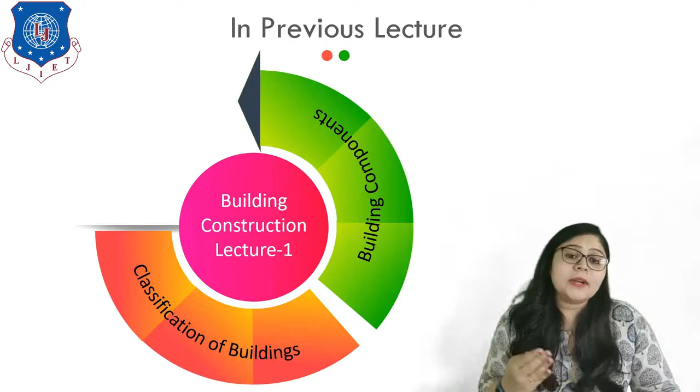In today's lecture, we are going to describe the types of load acting on a building, and our second topic is types of foundations. So without wasting much time, let's get started.

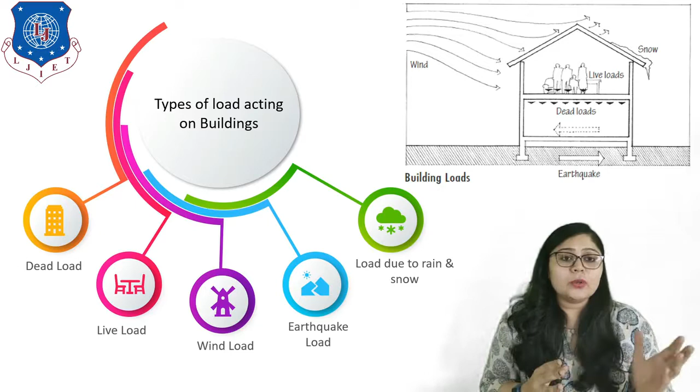What are the different loads acting on any building? Basically, dead load, live load, wind load, earthquake load, and load due to rain and snow are the primary loads acting on any building. Before constructing any building, we should understand and calculate all kinds of load acting on it so that we can provide safety factors regarding that particular load. On screen, you can see different loads acting with respect to different directions on a building.

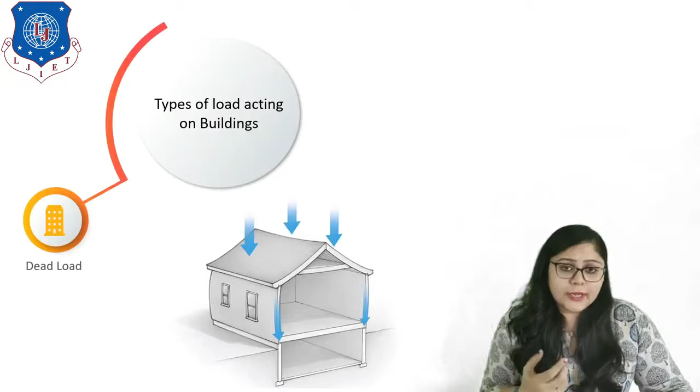Now let's discuss all in detail. First is the dead load. What is a dead load? It is a permanent, immovable and untransferable load, meaning it is something which is fixed. For example, the weight of material is something which is permanent.

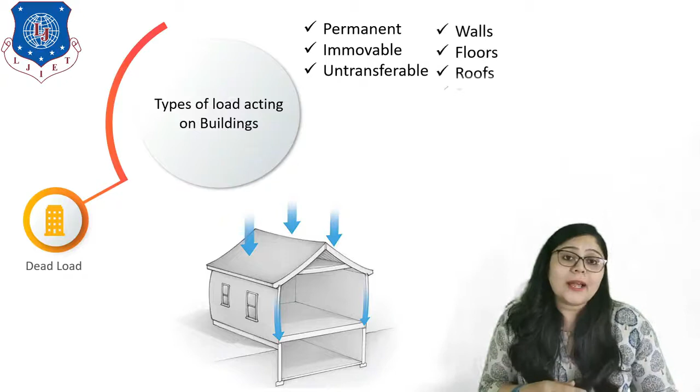Self-weight of structure is considered to be a dead load. All components of any building are considered dead load, like walls, roofs, floors, partitions, ceilings and water tanks. So the question is how to calculate a dead load.

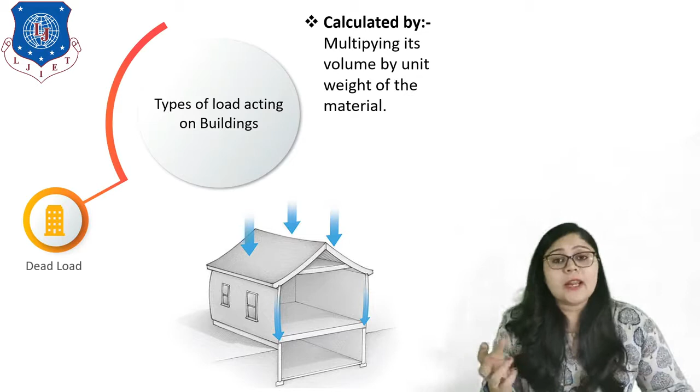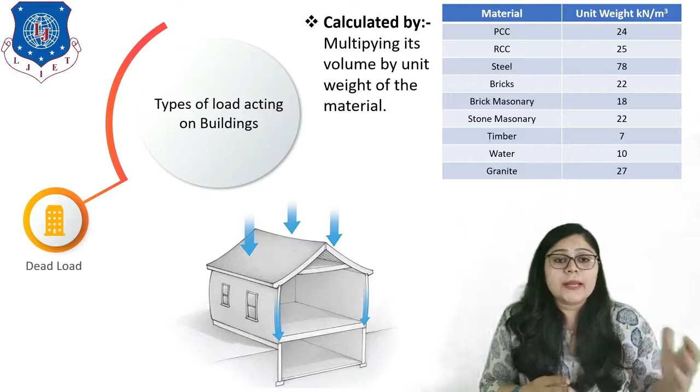We can calculate it by multiplying its volume by the unit weight of the material, because different materials have different unit weights. Here a table is given on screen where different materials like PCC, RCC, steel, brick masonry, stone masonry, timber, water and granite have different unit weights, which is important for calculation. So this is all about dead load.

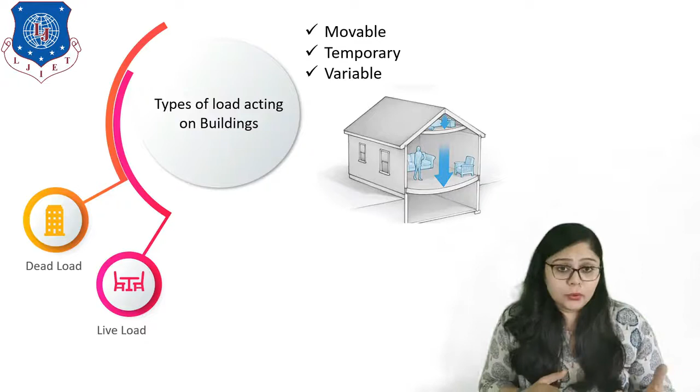Now let's move to the second one, which is live load. What is live load? Basically, a load which is movable, temporary and variable is considered to be live load. The people living or working in a particular building are considered live load. Even furniture is also considered live load because it is movable, and sometimes we can add and remove furniture as per requirement. So weight of inhabitants, residents and furniture or any stored materials are the live load.

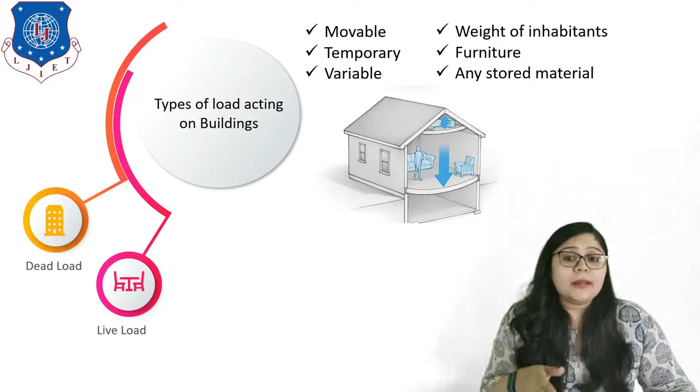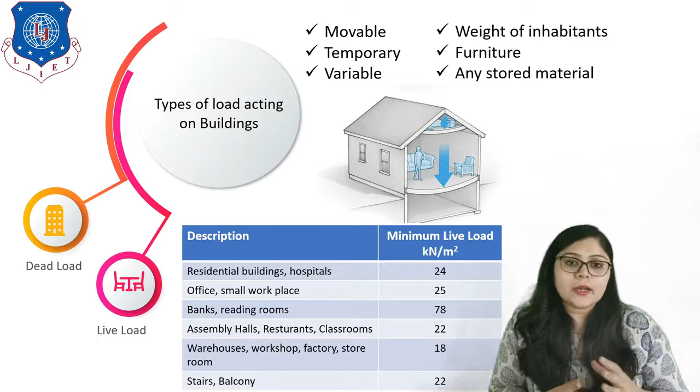Different buildings that we already learned about in classification of building based on purpose, like residential or industrial, all require different kinds of furniture, and the number of people varies accordingly. In this table, a description of different types of buildings like residential buildings, offices, banks, assembly halls, warehouses and stairs is given with respect to their minimum live load in kilonewton per meter square, for your better understanding of calculation. So this is all about live load.

Now let's move to the third load, which is wind load. Wind load comes into picture when we talk about tall buildings. Which building should we consider to be a tall building? When the height of a building is greater than twice its width, it should be considered a tall building. So this is the concept of a tall building.

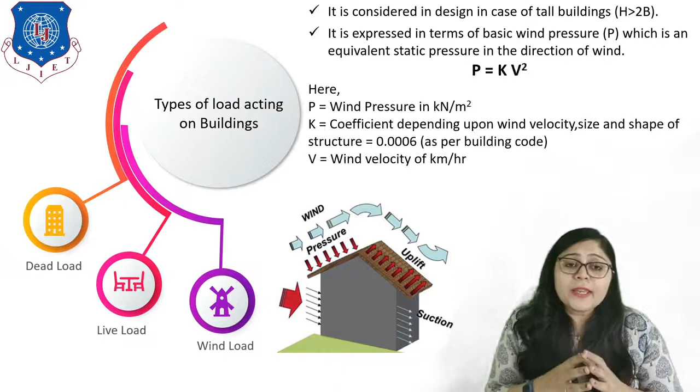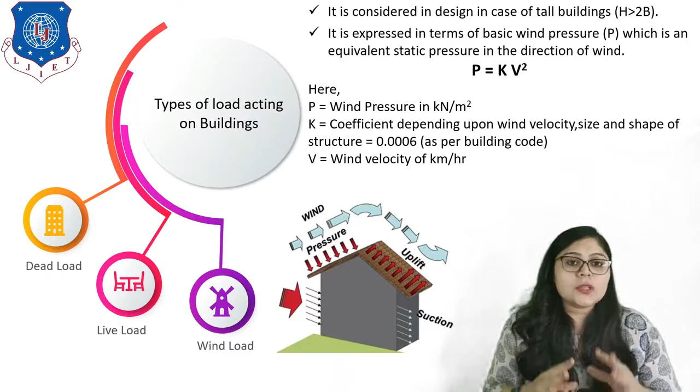Now you can see how wind pressure acts on any building. Generally it is expressed in terms of basic wind pressure, which is an equivalent static pressure in the direction of wind. To calculate it, P equals kV square, where P is the wind pressure in kilonewton per meter square, and K is the coefficient depending upon wind velocity, size and shape of the structure. As per the building code, it is generally decided as 0.0006, while V is the wind velocity in kilometer per hour. So this is the calculation for wind load.

Now let's move to the next topic, which is earthquake load. So what is an earthquake first? Let's assume we are moving in a bus. Whenever the bus is going and a sudden brake is applied, our body tries to resist itself at that particular point.

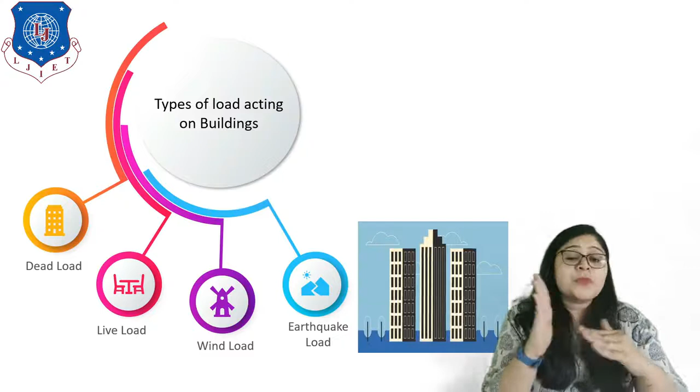The same thing acts with the building. When a building is standing, it is actually moving with the earth, but due to tectonic movements, or the movement between tectonic plates, a horizontal directional or sudden impact force acts on the legs of the building. So the building tries to resist itself. We can say earthquake load is something which acts horizontally.

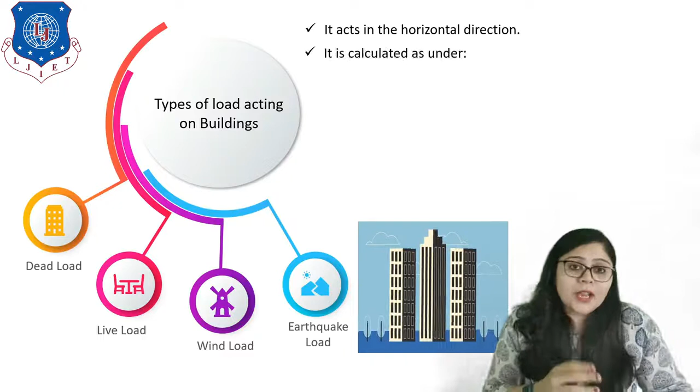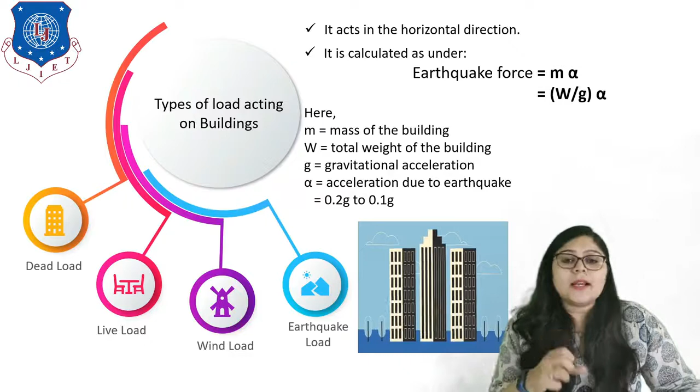Now moving further, the next is the loads due to rain and snow. Both these loads act on the roof, the uppermost area of any building. So depending on the shape of the roofs and its capacity to retain the snow and rain load, we should calculate its total load.

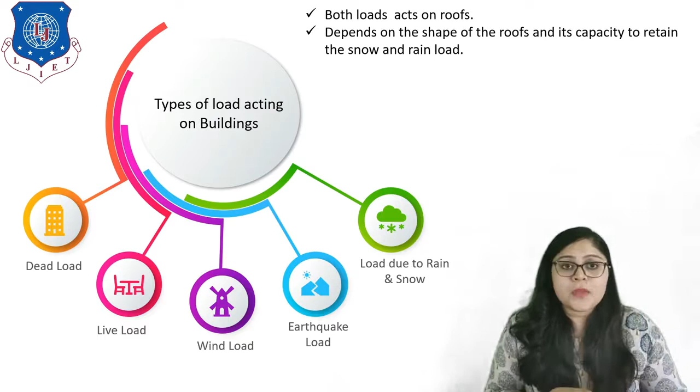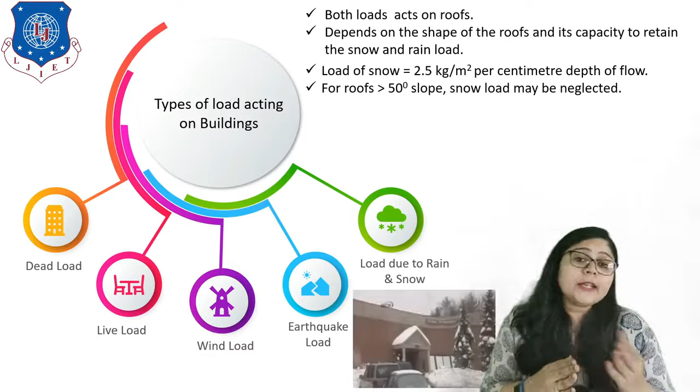If I talk about snow load generally, the load of snow is equal to 2.5 kilogram per meter square per centimeter at the depth of flow. If the roof has inclination greater than 50 degrees, meaning the slope is greater than 50 degrees, then snow load may be neglected as the snow removes itself due to the inclination. So that is the concept for snow load.

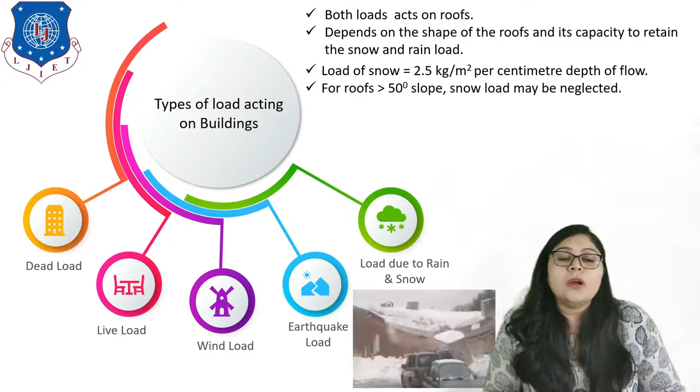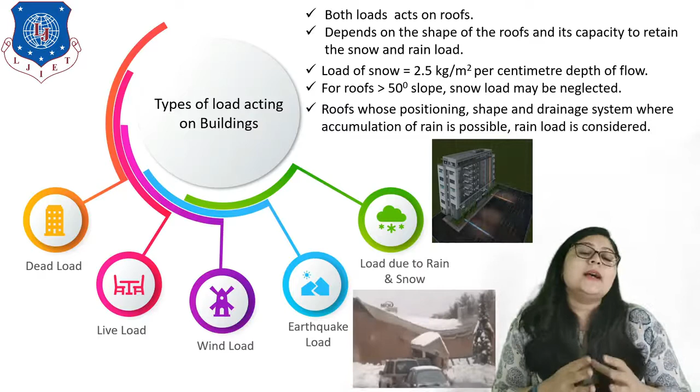Now what about rain? Generally, roofs whose position, shape and drainage system allow accumulation of rain, rain load is considered. So this is all about loads due to rain and snow. In this topic, we have discussed all the loads in detail: dead load, live load, wind load, earthquake load, and load due to rain and snow. I hope everyone is getting my point.

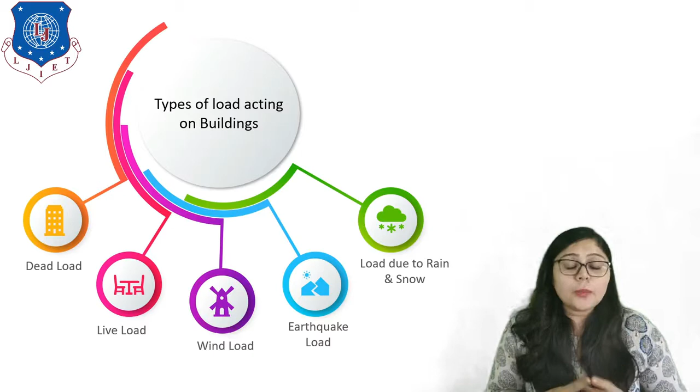Now moving to the next topic, which is types of foundation. So the first question is, what is a foundation? Foundation is provided to transfer the load of the total building to the soil. It is very important, the first step while constructing any kind of building.

It is divided into two types: first is shallow foundation and second is deep foundation. Below ground level, whatever we are constructing is known as foundation, and whatever depth, that is denoted by D, and the width that is denoted by B. If depth is less than or equal to B, it is known as shallow foundation, and if it is greater than B, it is known as deep foundation.

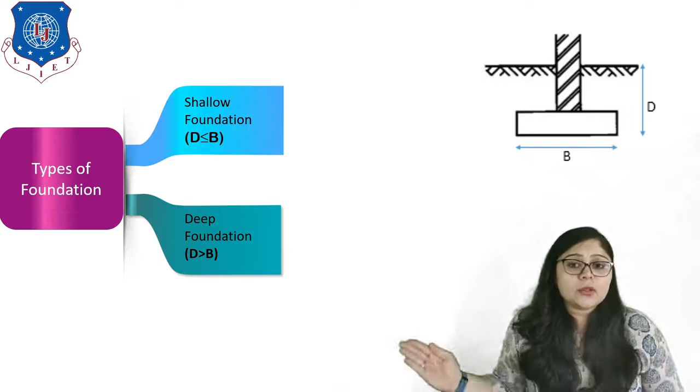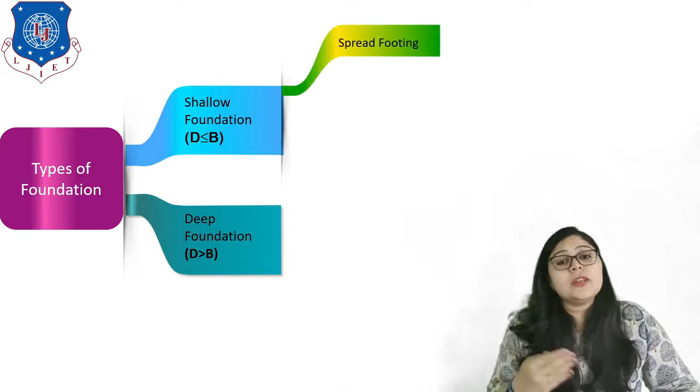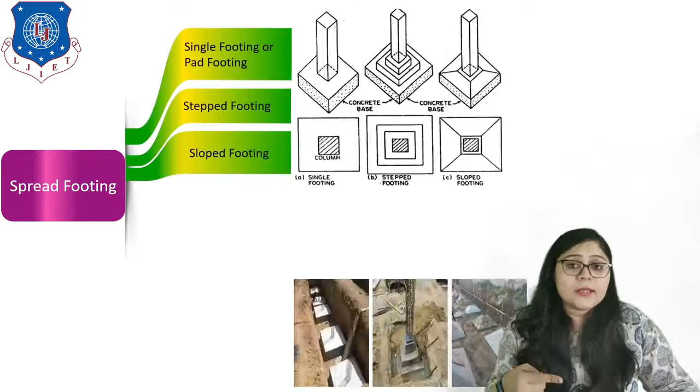Is it clear everyone? Now let's discuss it in detail. What is shallow foundation? It can be further classified into a number of types, in which the first is spread footing. So what is spread footing? Spread footing spreads the load of the total building over a large volume to the soil. Generally, it can be classified as single footing or pad footing, step footing, and slope footing.

Single footing is when a single column has a simple uniform concrete base below it. In step footing, we provide steps in between. Why do we provide this kind of steps? Because we want to transfer the load gradually to that particular base. It is very useful when the impact load is high and we want to transfer it very gradually.

The same case applies with slope footing, where a slope in trapezoidal shape is provided to simply transfer the loads. On screen you can see how this kind of construction can be done in the field. So this is all about single footing, step footing, and slope footing.

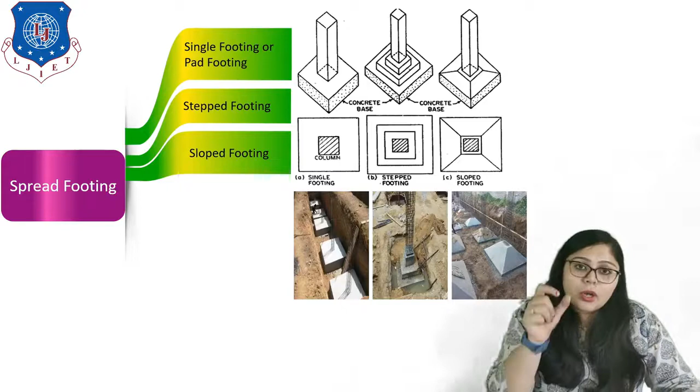Please keep in mind these are all for the columns, meaning if I am talking about a column, I am talking about a frame structure, right? Now let's discuss the next topic: simple wall footing and step wall footing.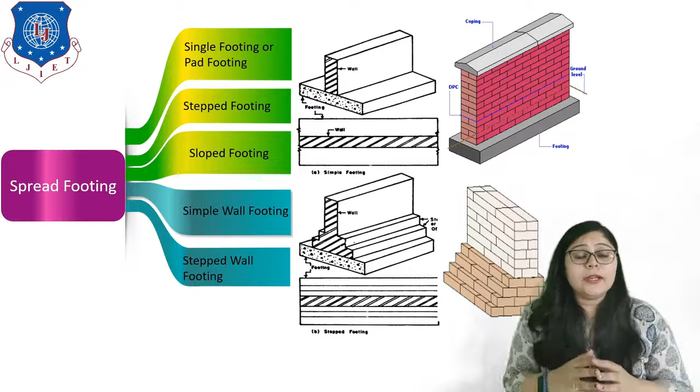So now you are getting the concepts and connections between load bearing structure, frame structure, and their foundations. You now have various options required for different types of load acting on a building and how to transfer it by providing different types of foundation.

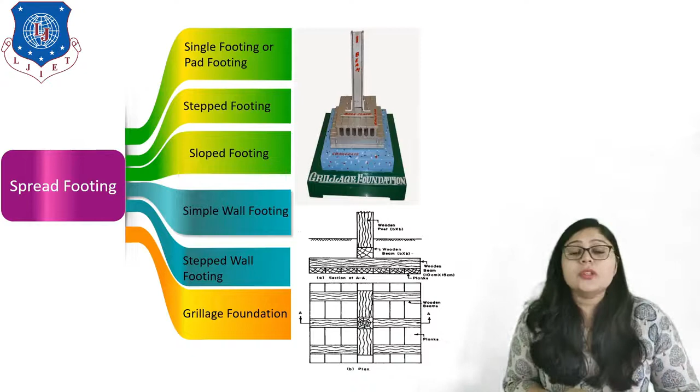Now let's discuss the next, which is grillage foundation. This is something provided below the structure. Here two examples are shown for grillage foundation. We can go for steel as well as timber grillage foundation for transferring the load. So this is all about spread footing, where we have talked about column, wall and grillage foundation with their various classifications.

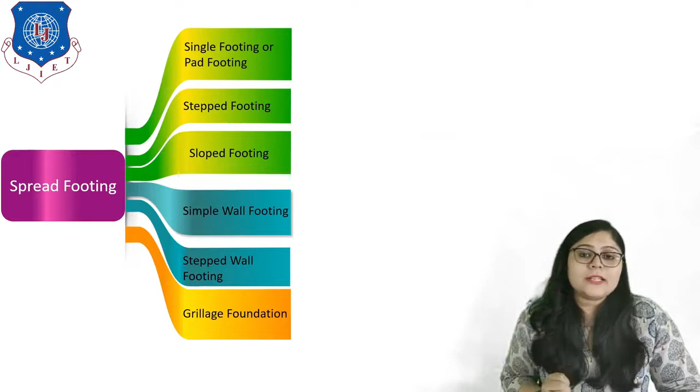Now let's go back to get a better idea of what we are going to discuss next in shallow foundation. That is strap footing. Now what is strap footing?

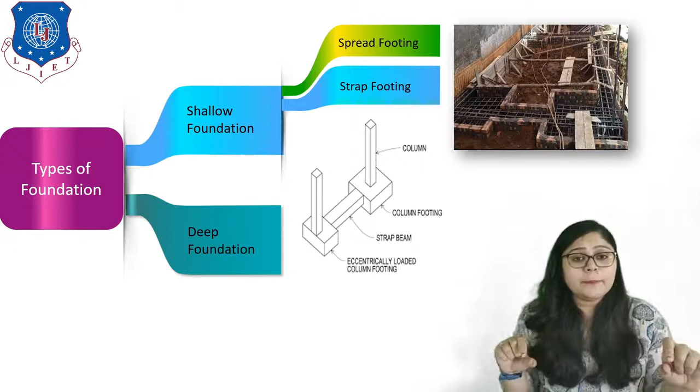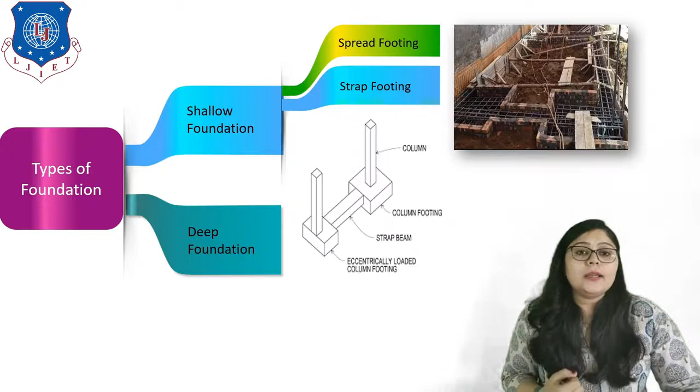Here on screen you can see two columns. When I try to transfer the load by connecting the two column bases with a simple beam, it makes transferring load easier, or provides more safety to our foundation. The beam connecting them is known as the strap beam, and the total footing connecting these two columns is known as the strap footing. This application is very useful in such field conditions.

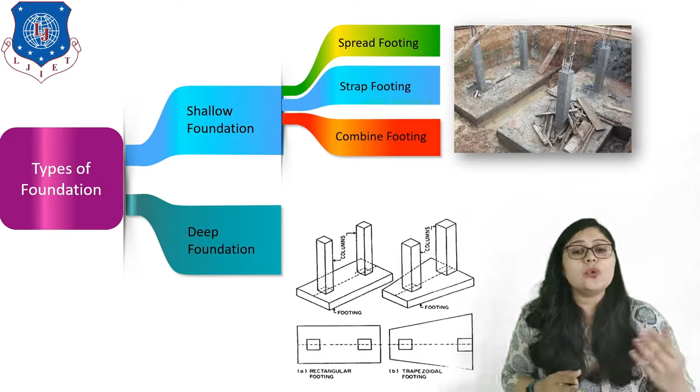Here on screen you can see two different shapes: one is simple rectangular, and the second is trapezoidal. When should we use the rectangular type of combined footing? When two columns have the same size, we go for rectangular; if the size of the columns is different, we go for trapezoidal footing. So this is all about combined footing.

Now next is the raft or mat foundation. Whenever I want to give proper firm support to my building, I provide one foolproof foundation matching the building's original shape below it. Now I'm not talking about the column or wall, I'm talking about the building itself. So whenever I put foundation with respect to my building's shape, size, throughout the building, I provide this kind of RCC material acting as my foundation. It is called raft or mat foundation.

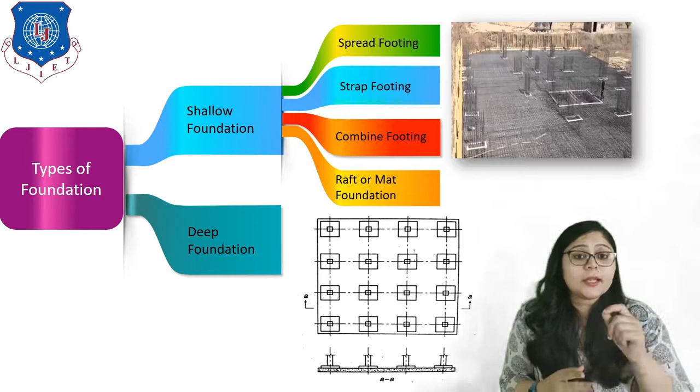It is very good in terms of strength. So when we are talking about multi-story buildings, maximum load is going to transfer to the soil. At that time, this kind of foundation is a very good option. So this is all about shallow foundation.

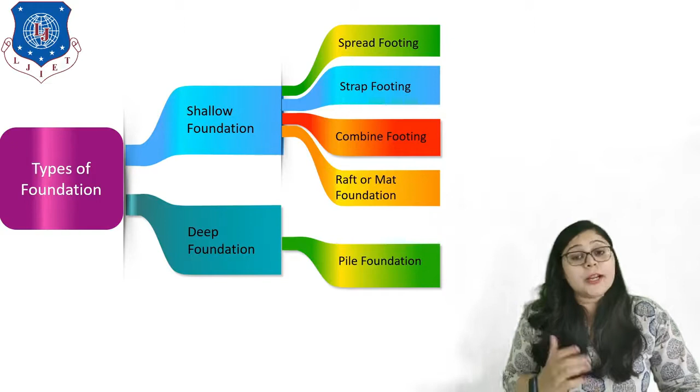Now last we will discuss the deep foundation. It is also known as pile foundation. The question is, what is a pile foundation?

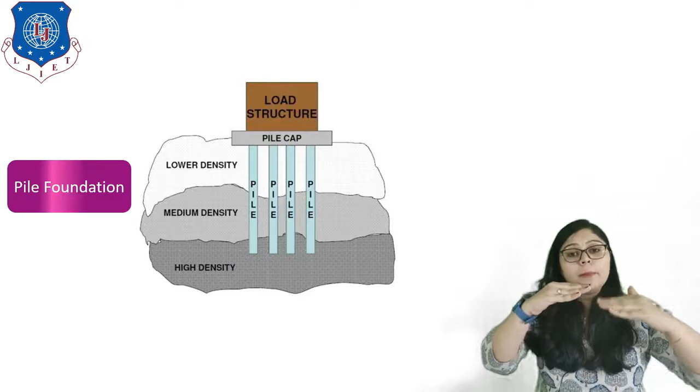Deep foundation or pile foundation is needed when we have to go deeper in the soil, dealing with multiple strata of different densities. On screen you can see lower density, medium density and higher density layers. The structure shown is the pile, which goes up to a certain depth.

If I transfer the load directly to that foundation or the piles, it is not a practical solution. For that, I have to provide a cap known as the pile cap, which transfers the total load of the structure gradually to the pile and then to the soil. This is the concept of pile foundation.

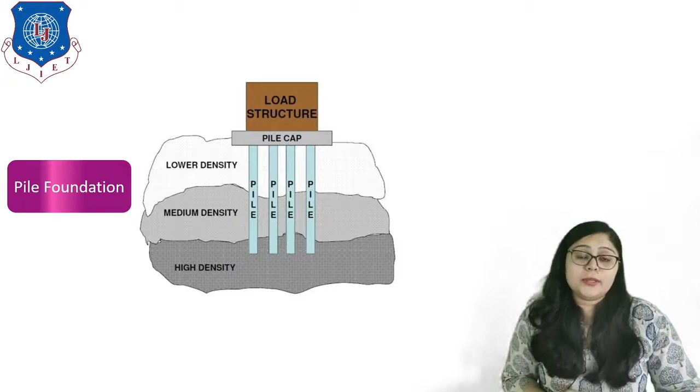Now let's discuss how we can construct this kind of pile. First, we have to install the casing, meaning the outer frame. For that, we first drill that particular area, or excavate the earthwork.

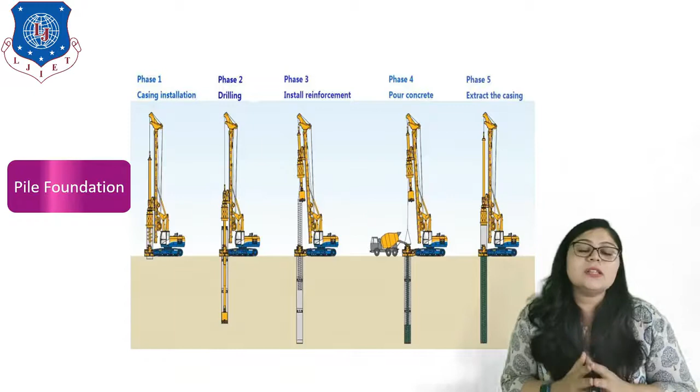After excavation, we reinforce or install our RCC mixture so it can be stabilized there. After some time, it sets at that position. Then we extract the casing, meaning our piles are now set in the soil, positioned according to our requirement for load transformation. This is the procedure for pile foundation construction.

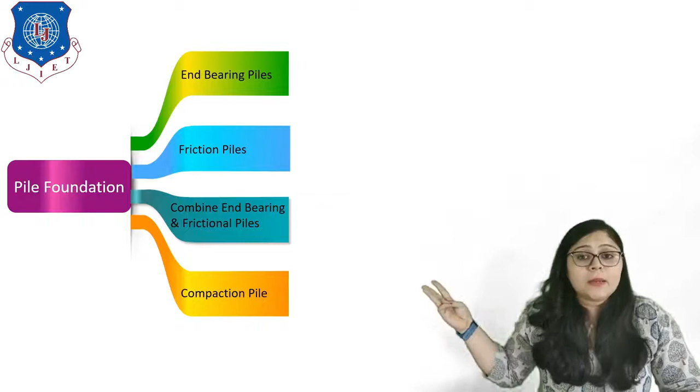Next and last is the compaction pile. Let's assume we have a plot where the soil type is sand. Now if I tell you to construct a high-rise or multi-story building on that particular plot, your question is how we can construct such heavy construction on that sand only, because as we all know, sand does not have a good bearing capacity.

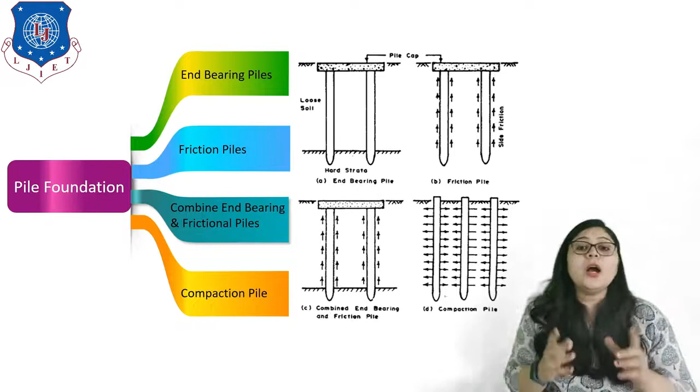So this is all about the pile foundation. Now you have a better idea of the types of foundation, what is shallow foundation, deep foundation, and the other classifications within that. So this is all about types of foundation.

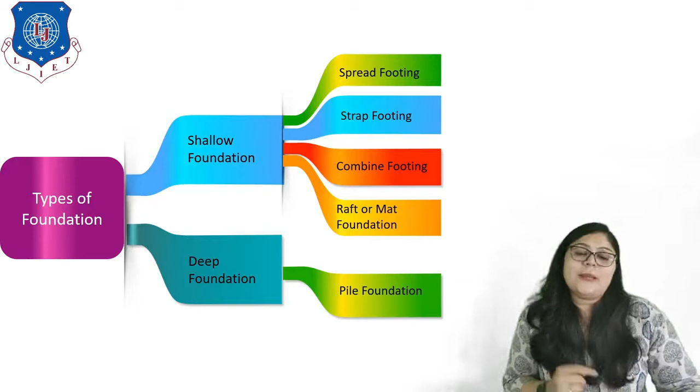In today's lecture, we have learned different types of loads acting on a building, which is very important before constructing any kind of building. After calculation of load, you can design the foundation according to requirement to transfer the load of the structure to the soil. So this is all for today's lecture.